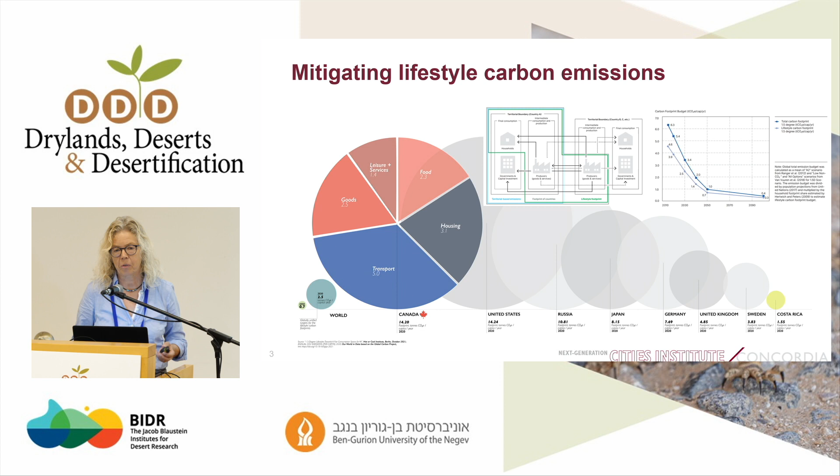We are at 14.2 tons per capita, and by 2030 we should go to 2.5 - a very big challenge. Even the sustainable scenario in 2050 should be 0.7 tons carbon per capita. So we are a very long way off.

But because this conference is not that much about mitigation, but a lot about green infrastructure, I'll show you a bit how we handle data and what we do with modeling. Of course, we also look at green infrastructure in cities and ecosystem services. So it's a bit of a mix - I threw together the different parts.

My expertise is mainly in the carbon emission part, but with a biology colleague, I have some graduate students who look at urban green infrastructure services, especially related to urban heat islands, because as you know, cities are very built up now, lots of impervious surfaces, so there is a strong heat island effect. Green infrastructure also has a big impact on air quality. So we try to look at all these connections between urban forms, urban morphology, whether it's built or green infrastructure, and the services related to it in a combined way.

In the end, we're trying to find the fair consumption space, because there are still people in this world who are underserved, who really should have better access to food and minimum services, but the richer we are, the higher the carbon footprint. So there's also a lot of people who need to reduce consumption.

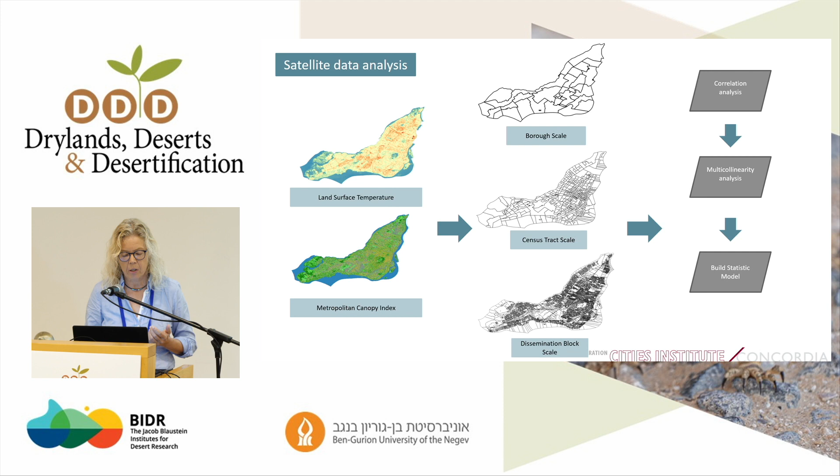We did some analysis of data correlating land surface temperatures and the canopy index to find out the impact of existing greenery on cooling on one hand and air quality on the other.

Remote sensing data doesn't give you very high spatial resolution, so we complement that with ground-based sensor measurements, and we try to find out the impact of composition - distribution of green space - but also configuration: how high trees are spread over the city, and what the impact is on temperature.

Here you see a well-known result: land surface temperature on the y-axis versus high vegetation, basically trees. Looking at it on a borough scale, there's a very strong correlation - if a pixel is very green, with a high percentage of coverage like parks, you get a strong decrease in land surface temperature. It can be up to 10 degrees or more.

If you go to finer spatial resolution, on the dissemination block scale for example, you see a much larger spread, because you start seeing small parks on street corners surrounded by high buildings, so the temperature decrease might be high, but might also not be very strongly affected by the greenery.

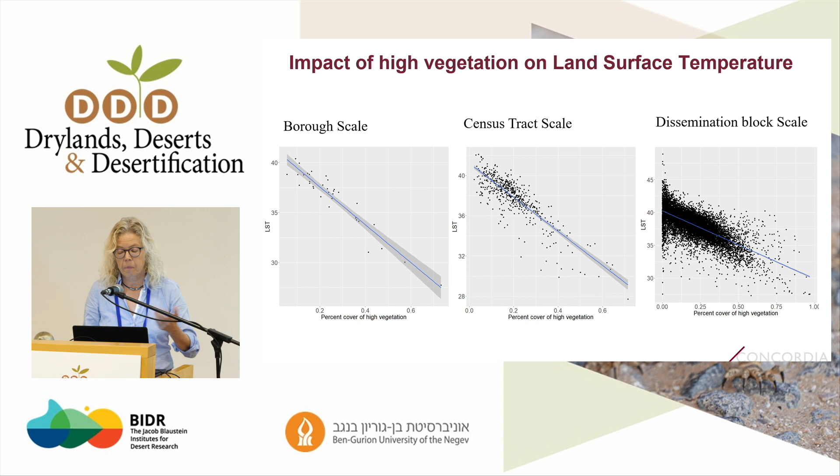That's one result. Low vegetation is a more complicated story - the correlations are weaker than the tree correlation. But of course low vegetation has an impact on surface temperatures, again with a big spread. So now we're trying to understand in more detail by going on the ground to see exactly what the configuration does to temperature. But that's only one aspect.

As I said, we also look at whether it induces people to walk more, if it's a pleasant green environment. So that's the data analysis part.

But as I said, in our platform setup, we also look at connections to modeling tools. Everybody who works on building energy modeling has tools available like Energy Plus or TRNSYS that can dynamically model the heating and cooling load for a city. We use the same front end now to come up with use cases - select an area in the city, give me the status quo energy consumption for heating, cooling, electricity - and then do some scenarios.

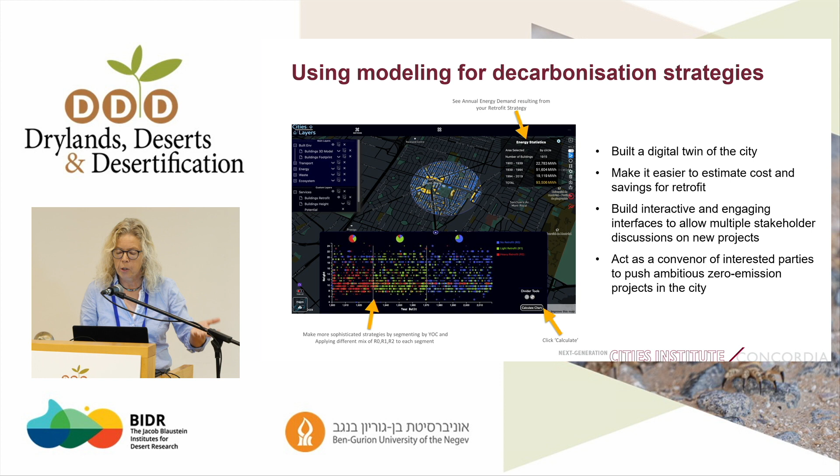Build to code, retrofit to code, or retrofit to a very high efficiency standard, and plot the results over the year of construction of these buildings. This is a municipal strategy tool to plan and cost retrofit scenarios. You can do it per building type, say give me all the hotels, or now Quebec wants to do a regulation on restaurants, and these kinds of tools help quantify what retrofit scenarios really could do.

I don't want to talk about the details of the platform. It's a big undertaking to make an open source, very modular platform. I would be very happy if people want to collaborate, because we need to go across the domains, connect transportation, buildings, green space, and so on. We need a big data handling part, lots of models from different domains, and then some clearly defined interfaces in the middle to connect to different front ends, that's the only thing the user will see and interacts with.

I just want to show you a few of the front ends, because that's probably where we define best scenarios and also start working on user interaction. The front ends also depend strongly on the use case, whether it's a citizen project, a municipal stakeholder, or a real estate setting.

So what we can do with the tool on the mitigation part of the built environment is compare the energy performance of different urban settings, because we have a big debate in Montreal about how dense, how high, what is most sustainable. You see on the top left typical Plateau residential neighborhoods, 3 to 4 stories.

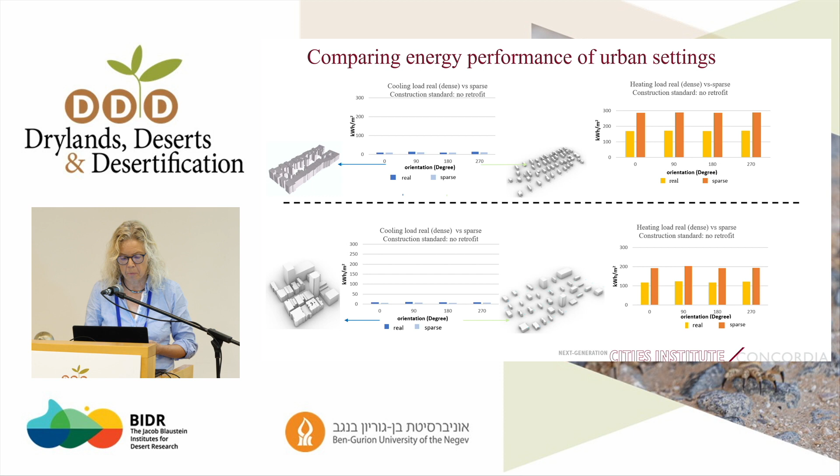You also see that the downtown core has, for both scenarios as it is and sparse, a lower heating demand. Again, the same reason: the buildings are larger and more compact. So this is the kind of analysis we can do.

We can do it building by building. So in the end, we can go to every real estate person and say, okay, look at this building, that's the retrofit you can do. Now I want to talk a bit about the applications and the front end.

I showed you this 3D web interface. The second thing we did, starting first with a competition project, is to say, well, now we have a building complex that needs to be retrofitted, and we wanted people in the neighborhood to play with the model.

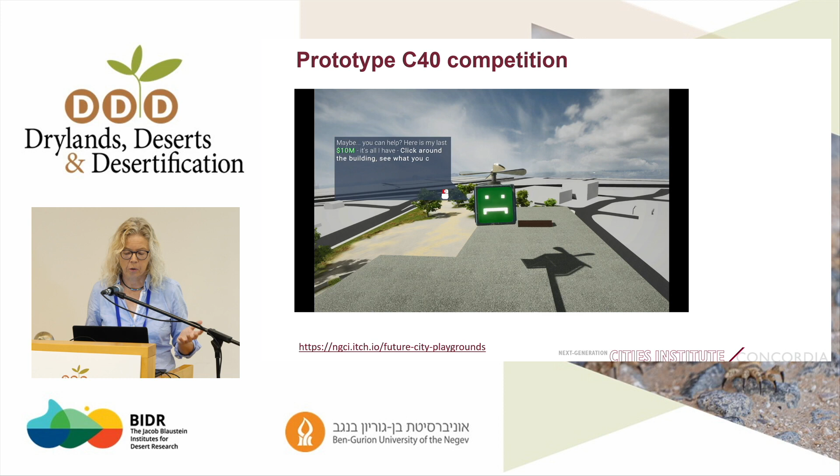So we still do energy, basically life cycle carbon assessment of the project, also life cycle costing, but we want people to play themselves. They don't know that there's Energy Plus and dynamic simulation in the back end running using this API. They basically say, I've got $10 million, who can bring down the carbon emissions the most for the least amount of money? That was the challenge, and we got a lot of people to play. Of course it's just simulation, not an optimization tool, so you can change whatever you want.

You change the wall construction, you change the window types, you can increase the window surface areas. It all costs you money, of course, but it reduces carbon emissions. We also introduced renewables on the roof, and we can put green roofs that might increase the insulation performance of the roof. So we can do quite a lot of variations, and what you get out is the lifetime carbon emission.

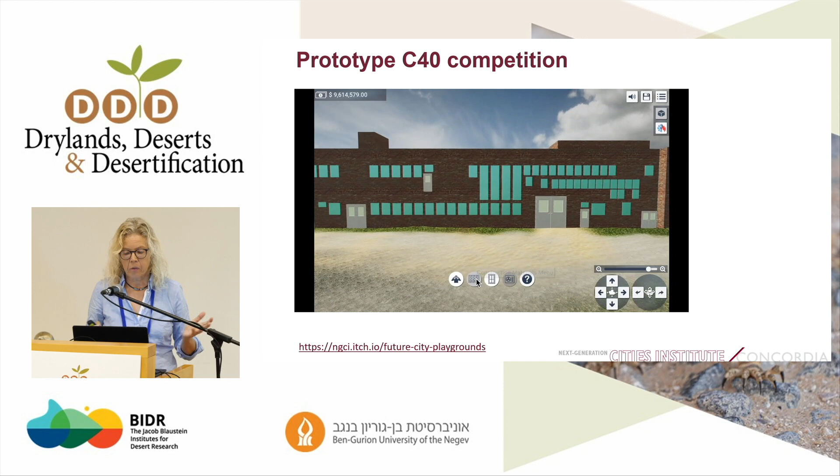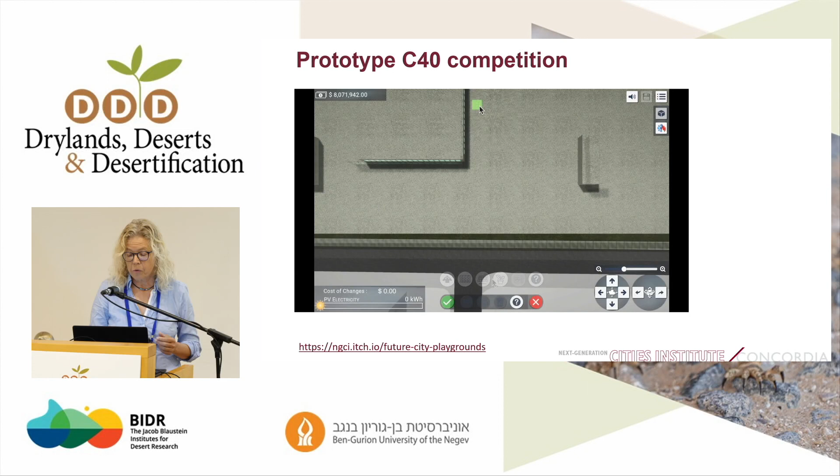This was still a pretty simplified prototype, not that many materials included. Now we made a version more for professionals where you have the full ASHRAE catalogs of building construction materials, and you can really combine materials as you wish. Of course, there are predefined layers for people who don't know much about insulation at all. As I said, you can also put solar panels on the roof, and do some energy system variations and so on.

So it already offers a lot of opportunities, and it's really simple to use. You don't need to be a building physicist. You learn a bit of what certain technologies do to your overall carbon footprint and how much it will cost you. So that was basically the first time we went a bit into gaming.

This is a Unity game engine that we used, and I'll show you where we took it from this very first prototype. So this is now the second prototype, and we designed this tool also based on Unity.

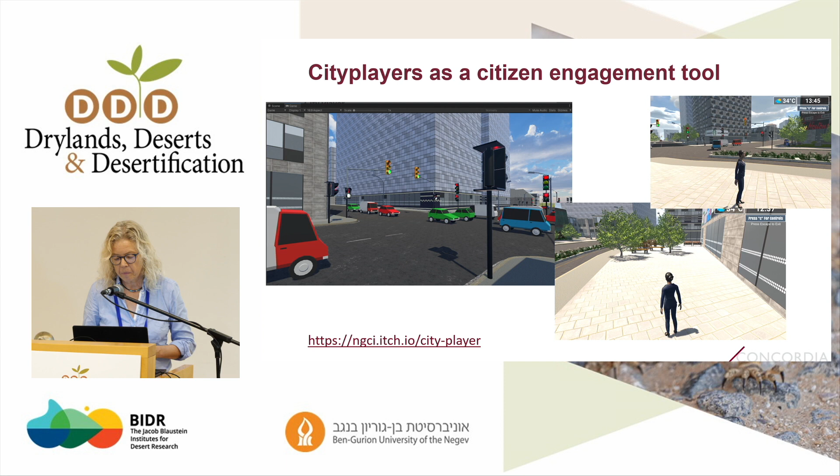This is basically around our campus in Montreal downtown, the Concordia campus. What we try to do here is say, okay, we can calculate all these indicators, life cycle carbon emissions, microclimate, air quality, lots of quantitative indicators, but how do people actually feel about what they see? If you change building heights, if you put in more bike lanes, how do people accept it, or what do they prefer?

This question about height of buildings and density is, in my opinion, very unclear in terms of what people really want. And it depends on who you are, whether you're a child, a single mother, or an old person.

So we have these versions. You can play different roles in the game, but you can also play as the city planner and say, now let's talk about density, let's increase density in the existing stock, or put new buildings in the parking lots, and so on. As it's a game, you need to do a bit of work to unlock further levels. At the beginning, you can just change the height and the usage of the building. And it does work.

I don't know whether I can talk about it. I won't sing, I promise.

So you change the height of buildings, and you get all these indicators on sustainability, but also other indicators like green space, access to public transit, and so on. So here we changed this, this is more the city planner view.

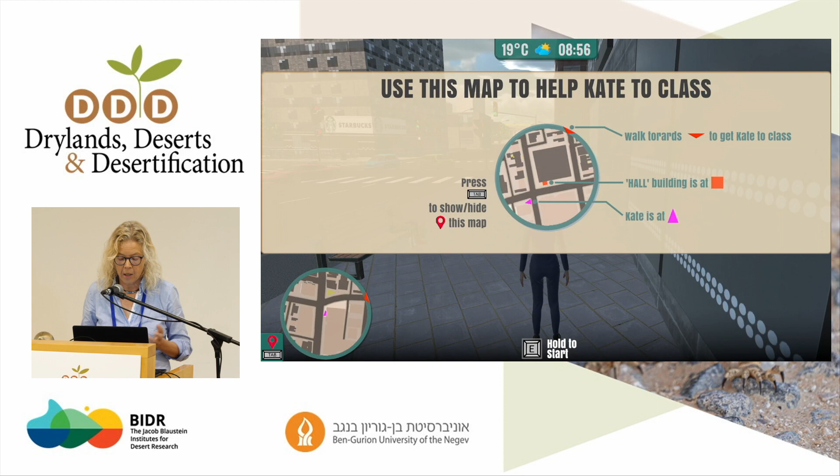You can select buildings depending on type, but then you zoom into a person and play a day in the life. You get some tasks, and for example here, the student needs to be in class by 9 a.m. and has only a few minutes.

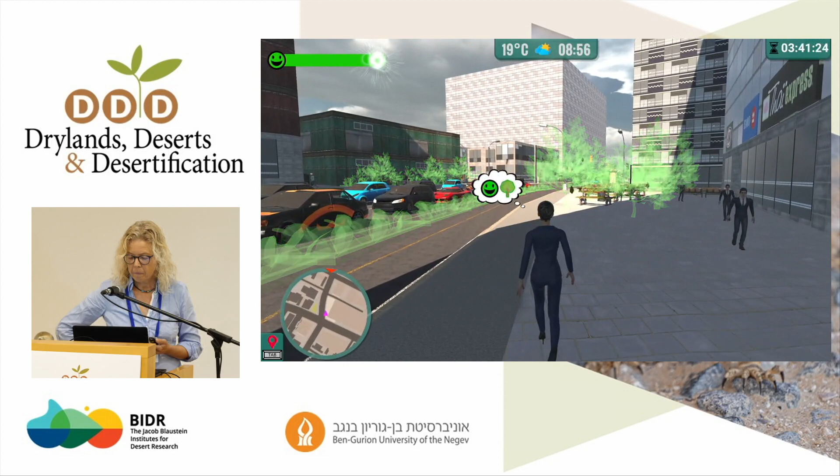Yeah, so now we want to have scores of how people like the environment they walk through. I always love seeing trees, truly pleasant to the sight. And the goal is to make the player as happy as possible, because that gives you eco credits to then do further action. It's not all that safe to walk here. Oh no, I don't have much time left. Ugh, I hate waiting. It wasn't me who designed the high heels, by the way. The city really should work on this public hygiene. Quite a nice touch of nature. I'm here early.

So then, depending on how good the experience was, you earn credits. You can then go to the next level and change more things in the city. As I said, we just started that a month ago. It's a very, very early prototype, but we want to really use that in the city to get feedback from the users of what they like and what they don't like.

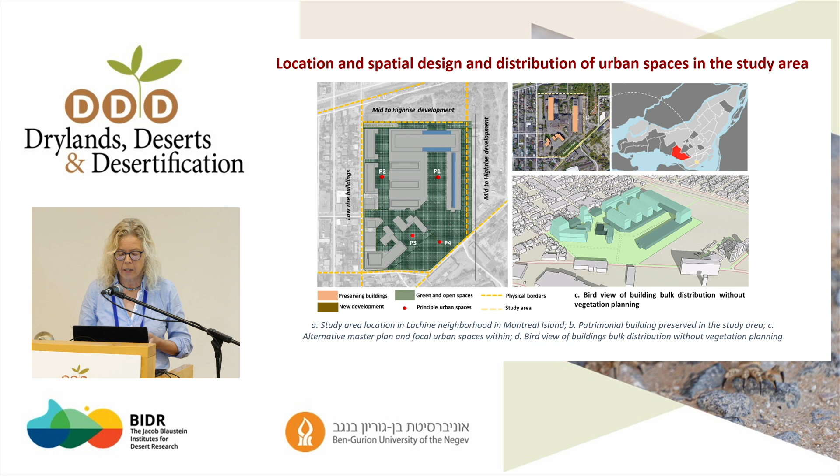Okay, I want to just finish off in the last 2 minutes with one last point on this combination of 3 models. Here we worked on an existing district and basically tried to look at what the inclusion of greenery would do to the indicators on microclimate and walkability.

So we have now different tools to generate different configurations of geometry, but also of greenery, so low, middle, high shrubs or trees, and so on. This has an impact on the detailed temperature distribution. So we model the temperature distribution, wind flows in the canyons, and so on in these areas. In the end, you get quantitative information on how a certain tree coverage, for example along the pathways, changes temperature levels, making it more comfortable to walk.

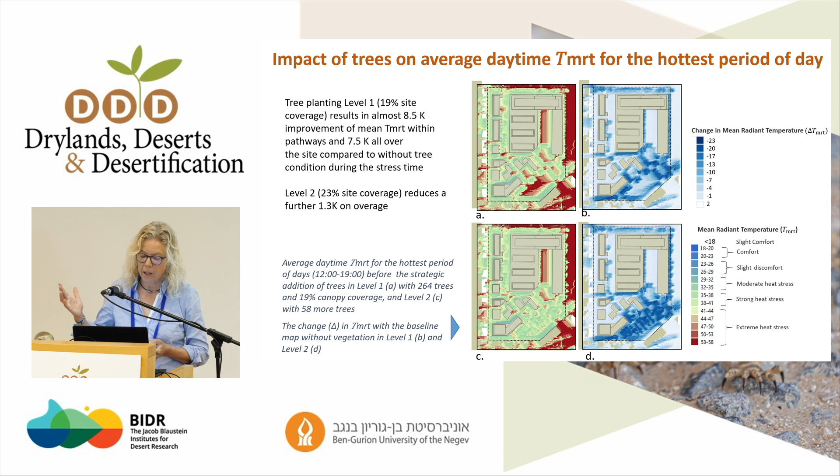That's one thing, but whether people do walk more is, I think, a different story. That's why we want to have these other approaches, going beyond the quantitative information we can calculate, to see whether people really walk more. To get that into practice, we also work with stakeholders in the city. One idea, because things are moving very slowly, is that we're never going to reach the 2030 goals if we continue at this pace.

One of my activities is to bring decision makers together. We call it a SWAT team - a banker, the utility Hydro-Quebec, the city, and a real estate developer - to identify all the barriers to a more sustainable project. If it's financed, the banker has a green bond, and if it needs zoning, the city is at the table and needs to support the project. We'll do two projects every three months, starting basically now. I think that's our attempt at going beyond modeling, bringing real change to the city.

To conclude, I think simulation is useful because it helps quantify things, but also, via these game-like tools, to get a feeling of what people prefer - better than surveys, I'd say. Eventually they'll have virtual reality tools to really walk around the areas and give us feedback on what they prefer. Whatever we can do, we need to bring in all these different methods to achieve faster rates of decarbonization, because I still believe in mitigation. Thank you very much.

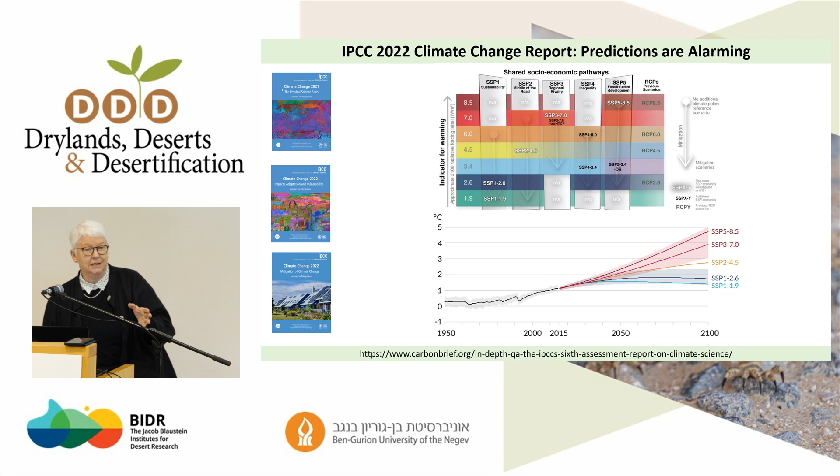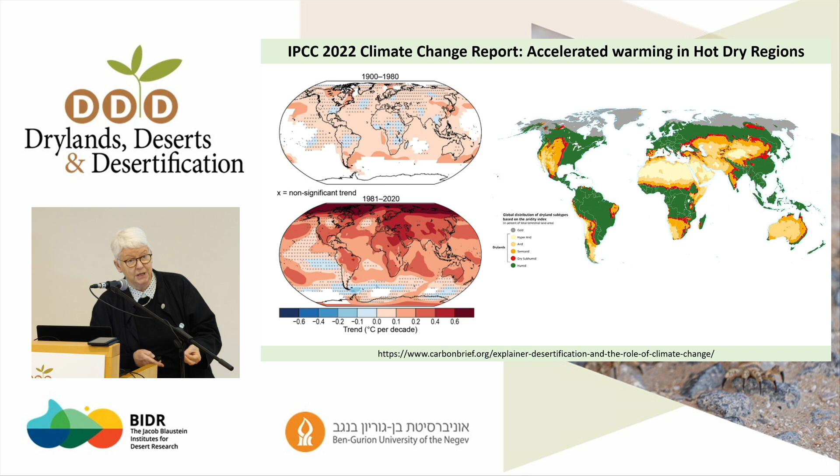This is the IPCC 2022 Climate Change Report, volume 3, on mitigation, and the predictions are really alarming. Looking at current projections, we're looking at a 3 to 5 degree centigrade increase in temperature. We're at 1.5 now, and look at the climate catastrophes already hitting us around the world - records broken almost every day. And of course, accelerated warming in dry regions is going to be a real challenge, as we've heard.

Now, what about temperature? Temperature kills. The 2003 European heat wave - over 72,000 people died in buildings during that one event. In 2022, we had heat waves across Europe, and over 20,000 people died in buildings during that event. And the 2003 heat wave, by 2050, will be considered a cool summer.

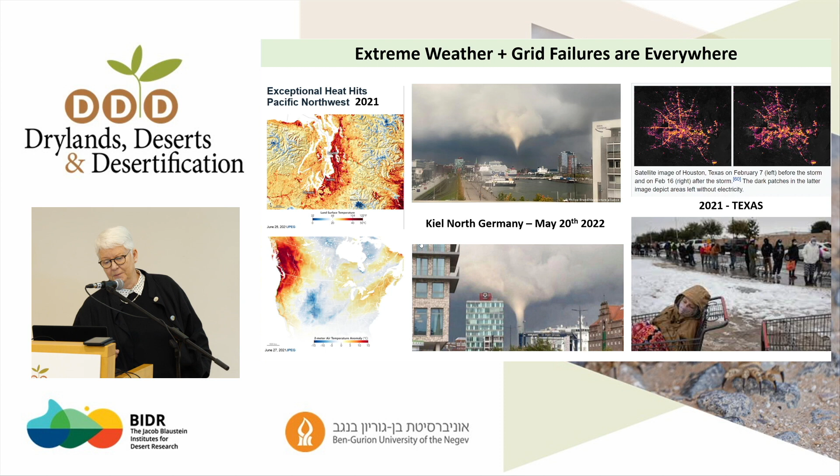So let's talk in real terms about what's happening. It doesn't matter how rich or poor you are, or where you are - these weather catastrophes, these extreme weather events, will hit, and they will be associated with grid failures. That's inevitable, whether you're in Kiel, North Germany this year, in Texas with ice storms, or under a heat dome in British Columbia, Canada, where temperatures reached 43.

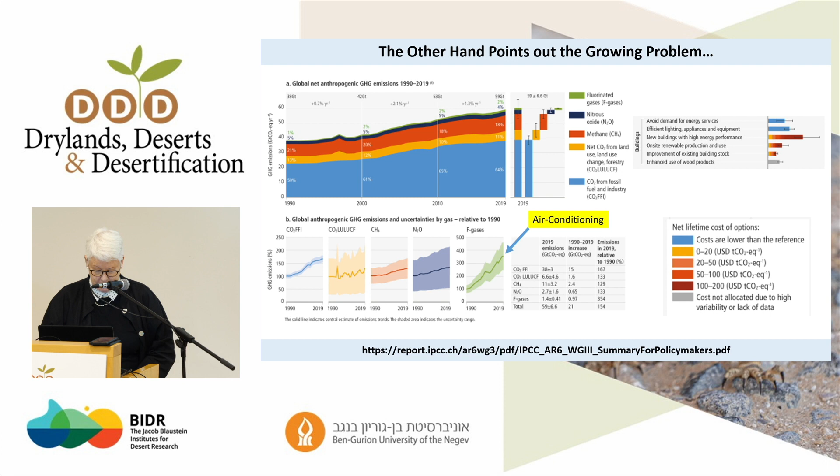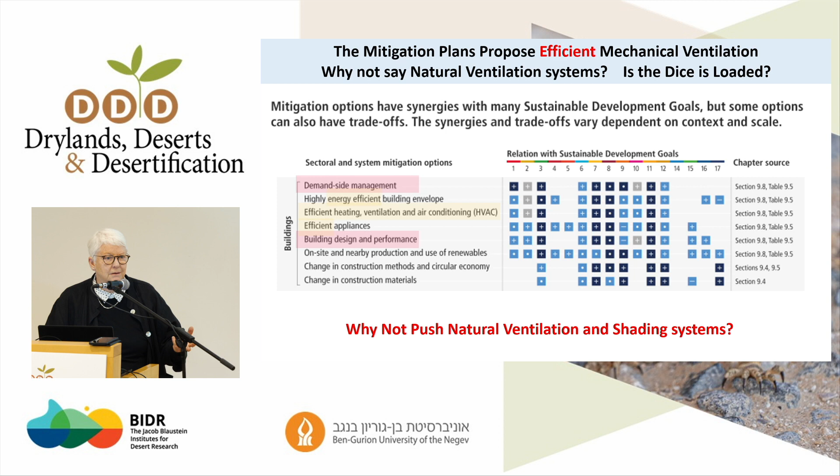Where are things like running buildings on natural ventilation? Where are important passive design features in that list?

Now, buildings are responsible for 31% of global final demand in energy, 21% of global CO2 emissions. Residential buildings are responsible for about 70% of global final energy demand for buildings. And between 1990 and 2019, CO2 emissions went up by 50%, and electricity used globally by 161%.

So what's happened to all the billions, if not trillions, spent on the big projects across Europe? Where have they evaporated to? They're having no results. So why?

Why not, again, say naturally ventilate buildings for as much of the year as possible? Why not say design energy sufficient buildings? Why not put in, again, mandatory shading? No, it's all product related.

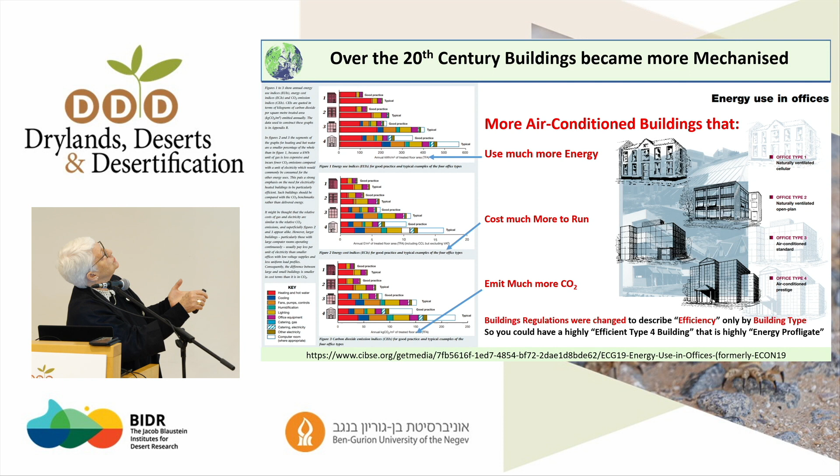This is from 1990—we knew back then. This is 1960s naturally ventilated. This is standard air-conditioned buildings in terms of energy use, and this is large prestige glass buildings, tall or not. So we got from the best of these naturally ventilated traditional constructions to there—you got 4 or 5 times more—and they are sold as efficient buildings.

This is the energy efficiency flaw, right? It is possible for a building, vehicle, or system to be highly energy efficient, while at the same time to be highly energy consuming. And by the way, if you want the slides, I put all the references for this.

And I mean, look—if we look back, say, at the Negev, we had the traditional buildings until about 1950. We got the introduction of a world in which energy was going to be too cheap to meter, built on the fossil fuel industry. These are the types of buildings that gradually grew up until we got post-1950s. We've grown into a world which normalizes the highest energy building types on the planet.

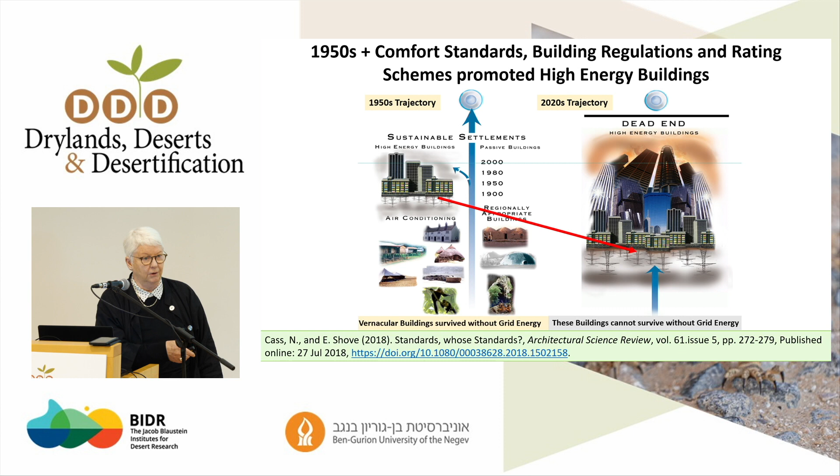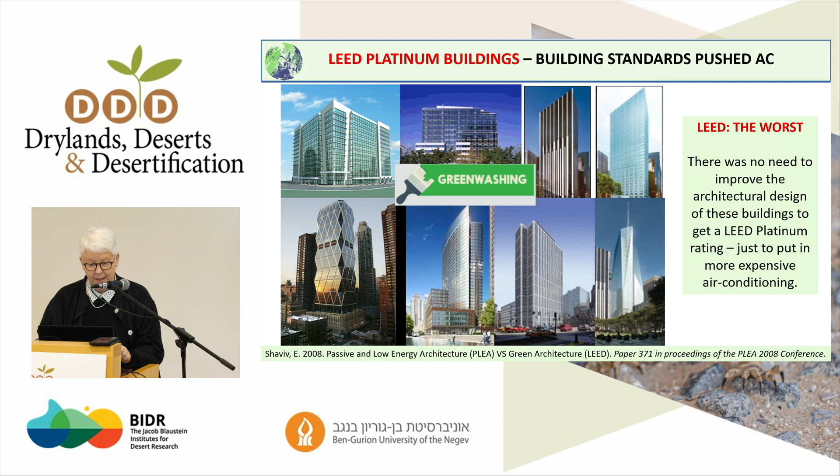For use by the rich—only the rich live in these or work in them. And then we overlay that with standards, rating systems, that greenwash—systematically greenwash buildings. LEED is the worst. You couldn't get a LEED Platinum unless you had full centralized air conditioning, as Edna Shaviv pointed out very carefully. This was originally run by Rick Fedrizzi, who's the environmental chief lead at Carrier Air Conditioning. So you couldn't get LEED Platinum without something like that.

And models are fine, but the performance gap—this is assumption-dependent design models. So they model in BREEAM or a complex model, which rarely reflects the actual performance of a building in use.

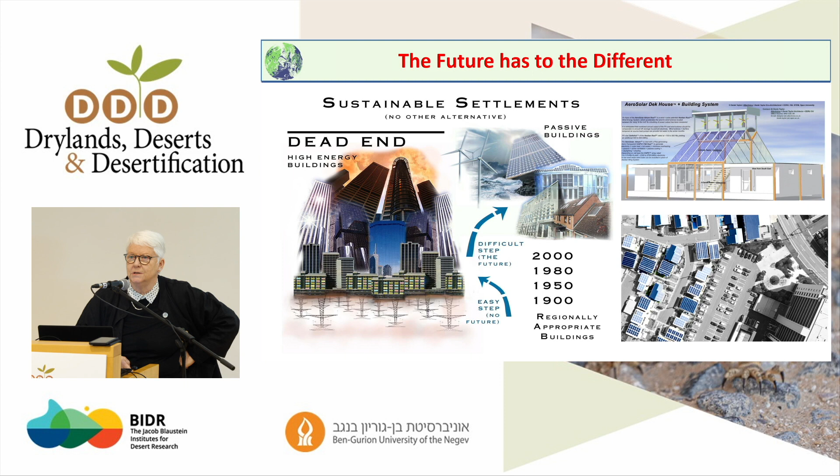The future has to be different. It has to be very different if we are to survive, if the planet's to survive. And IPCC has recognized this, so we're going now into sufficiency. Building sufficiency is put at the top of the list, right? Above efficiency and above renewable energies integrated.

Sufficiency measures tackle the causes of greenhouse gas emissions by limiting the demand for energy and materials over the life cycle of buildings and appliances. And that's different from energy efficiency, which in contrast is about continuous short-term marginal technological improvements.

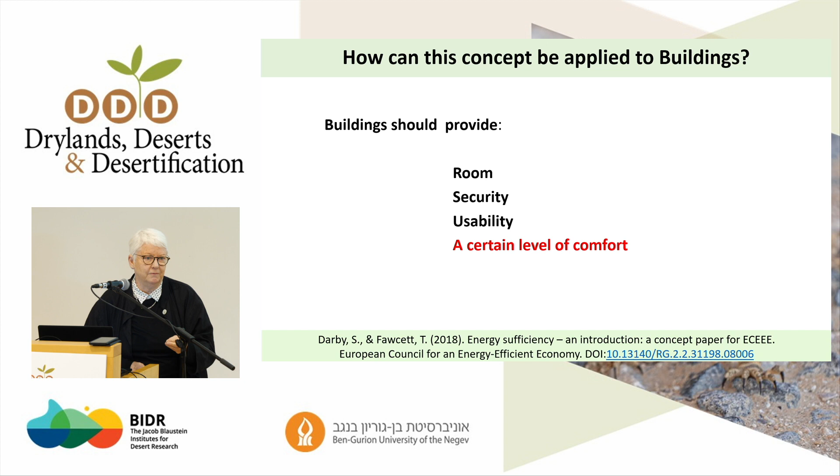Sufficiency, energy-sufficient buildings—sufficiency is about the amount of something that is enough for a particular purpose. And early publications on sufficiency, recent ones, this is 2018: buildings should provide enough room for you, provide security, usability, and a certain level of comfort. So comfort should be at the heart of the building solutions, right?

We have to have buildings that provide acceptable comfort temperatures. So what is an acceptable comfort temperature? Now, there's two methods of looking at this. There's the engineering, the HVAC engineers' measure, which is based on a heat balance method.

Typically like PMV, four basic physical parameters and two assumed levels of clothing and activity, based on very limited and often quite poor and dated laboratory research. These steady state conclusions come up with very limited comfort temperatures.

So for instance, they promote more HVAC in buildings by grading buildings, like an office building. An A-class office building has a very narrow temperature zone in winter and in summer. The narrower the zone, the more HVAC you need, right? So an A-class has to be a really high-tech, fully equipped, air-conditioned building.

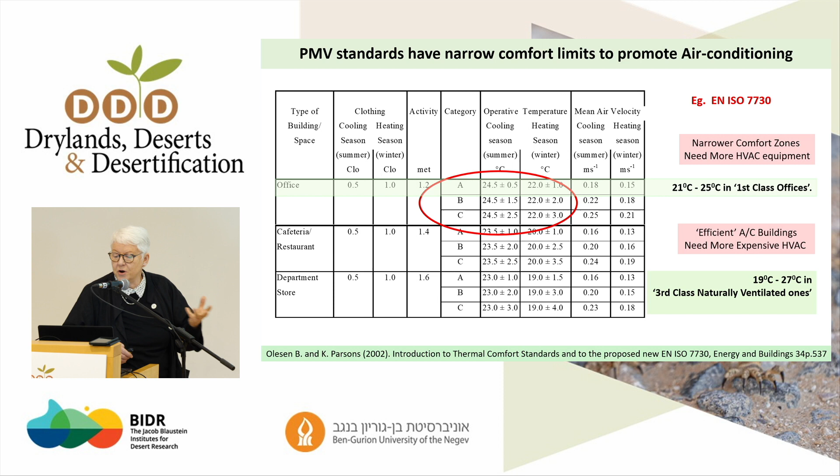A C-class, which is third-class building, has a much wider range. So first class might have 21 to 25, and a third class building might have 19 to 27. You can have that internally. There's troubles with very tightly controlled buildings, which have thin, tight skin envelopes, in that when the grid fails, you have to get out of them. And that happens across the world all the time.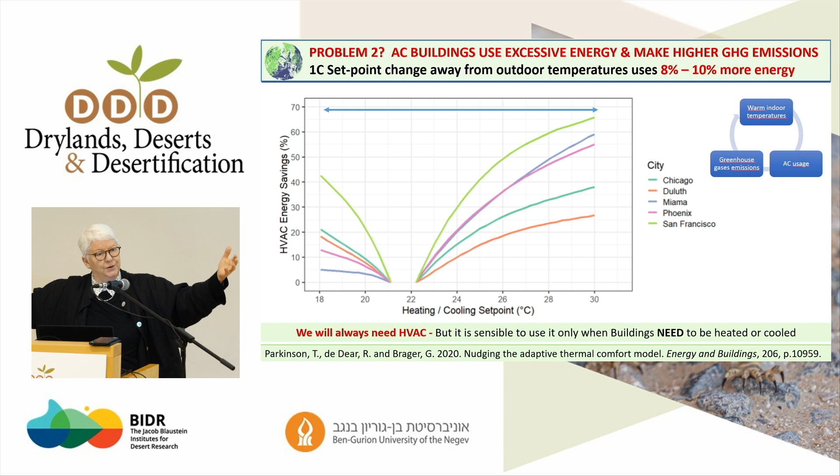They're doing this in a lot of countries. Netherlands now has mandated 18 to 28. You can have anything in that range in their government buildings. Italy's the same. So you just simply set the thermostat lower in winter and higher in summer, and you can save easily 8 to 10%.

Third problem with it is that the ASHRAE standards have led to significant overcooling of buildings. In America, $10 billion wasted simply by having buildings that are too cold.

Number 4 is that it's fine promoting and pushing efficient technologies on people like hydrogen or heat pumps, but people can't afford to eat. In Britain today, how are they going to afford to buy a £15,000 heat pump, let alone run it? So people have to get real.

The second way of measuring comfort is the adaptive thermal comfort, which came out of work from the 30s onwards in the BRE in Britain. And they showed very early on people can be comfortable from 38 to much lower temperatures, 18, 10.

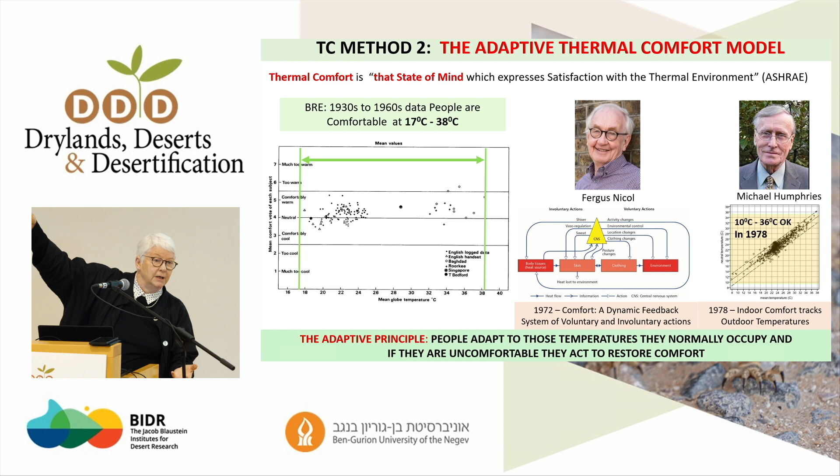Fergus Nicol and Mike Humphries, who I work with, Fergus Nicol did this wonderful comfort as a dynamic feedback system, and Mike Humphries showed the algorithm where the indoor air temperature you're comfortable at relates to what climate you're in. So the hotter it is outside, the hotter you're comfortable at. It's pretty simple, but he provided the algorithms we can use.

You just go into real buildings, you do a comfort survey, ask how people are feeling, what their controls are, is the window open, is the blinds down, ask about how comfortable, note their clothing, measure the environment. And out of that comes a lot of data from which you can extract the algorithms statistically, or you can look at comfort clouds.

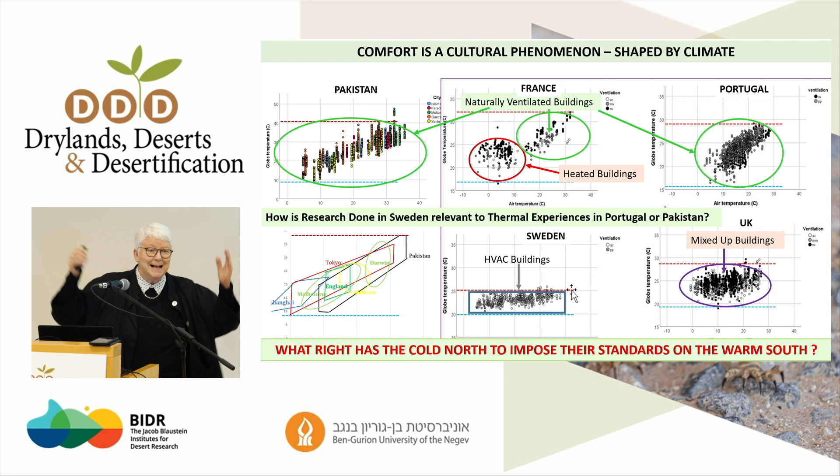People in France, they heat in the winter, they naturally ventilate in the summer. In Portugal, they naturally ventilate all year, they get a bit cold in winter. Britain's all over the place. In Sweden, it's a cold country, they just have heating on all year, and they have 20 to 25 typically.

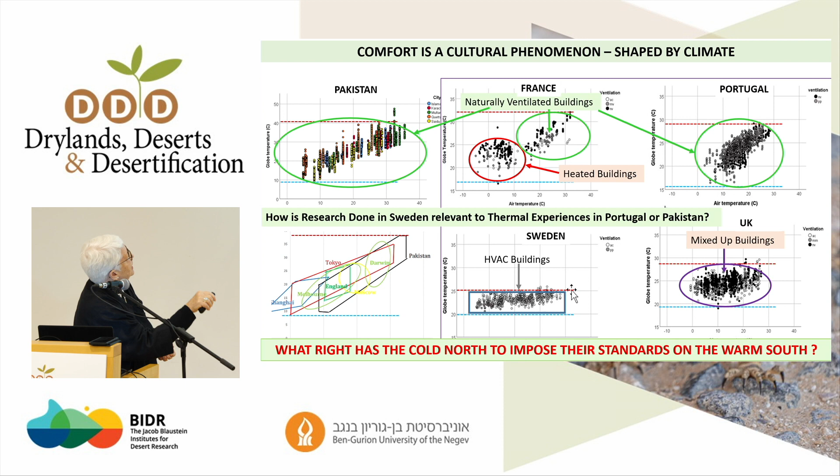And if you look at these comfort clouds from Pakistan, Tokyo, Shanghai, England, Melbourne, these are the comfort envelopes people live in.

International standards are a form of comfort colonialism. They take the ASHRAE standards and apply them to India or Africa. But comfort is what we do to avoid discomfort, to keep our deep body temperature at 37.

We interact with the world around us, and we can calculate this. We have involuntary actions of the body, like when we're cold we shiver, and when we're hot we sweat. Physiologically, we adapt. The naked body doesn't need to do anything to keep comfortable between 28 and 33.

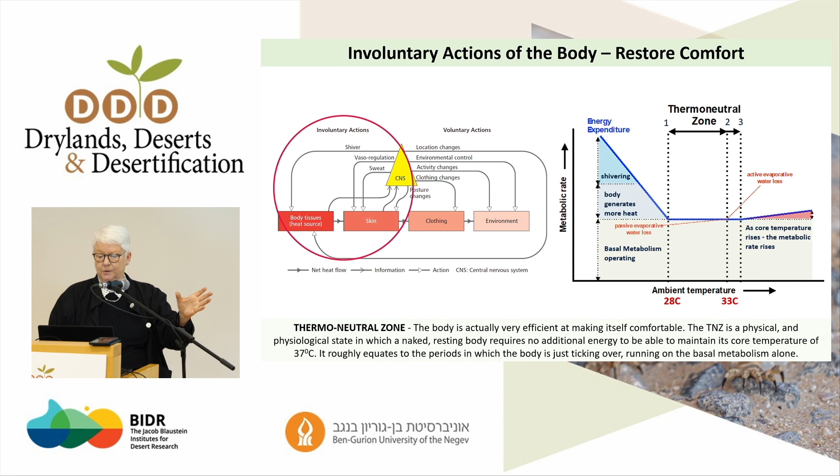We change our clothing and activities, and we exploit adaptive opportunities, open a door, window, fan, etc. Change rooms, change places. The principle is people adapt to those conditions they occupy, or else if they're not comfortable, they change them within limits.

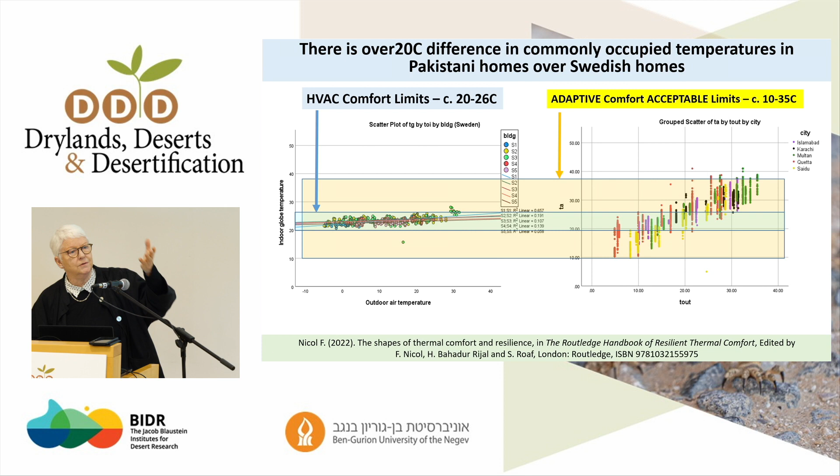And here's the limits. From thermal comfort studies around the world, people can adapt fairly easily anywhere between 10 degrees centigrade indoors and 35 degrees indoors.

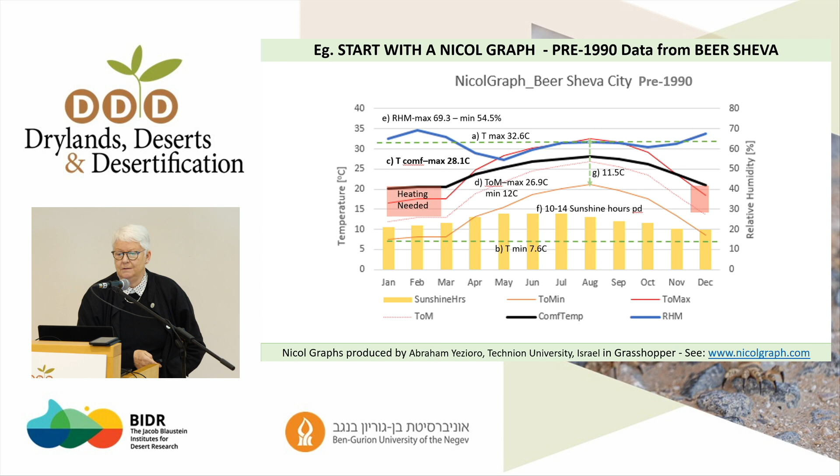Now, if anybody's interested, I will show you how we use Nicol graphs. This is a Nicol graph from Beersheba for pre-1990, and it shows that we got maximum temperatures of about 32.6. And that can tell us what sort of building is suited to the Beersheba climate.

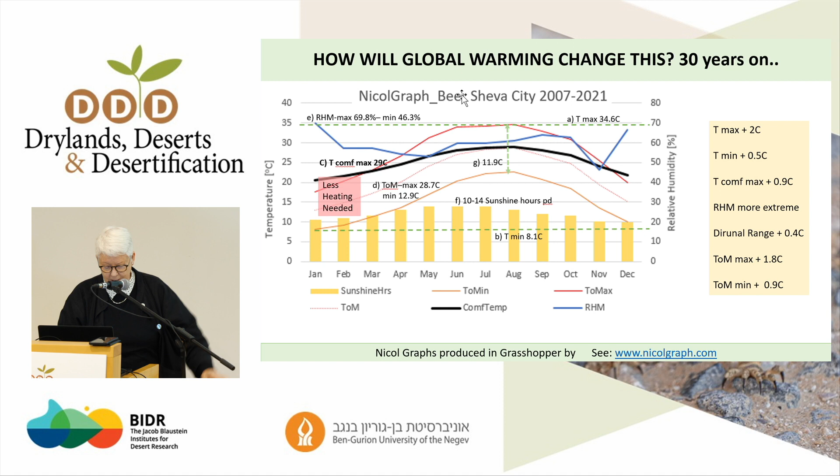What we have to do for buildings in the 21st century is move beyond the HVAC building, which was the dream of the 20th century HVAC industry. That's already business as usual. The future has got to be mixed mode, so you use cooling and heating only when you need it.

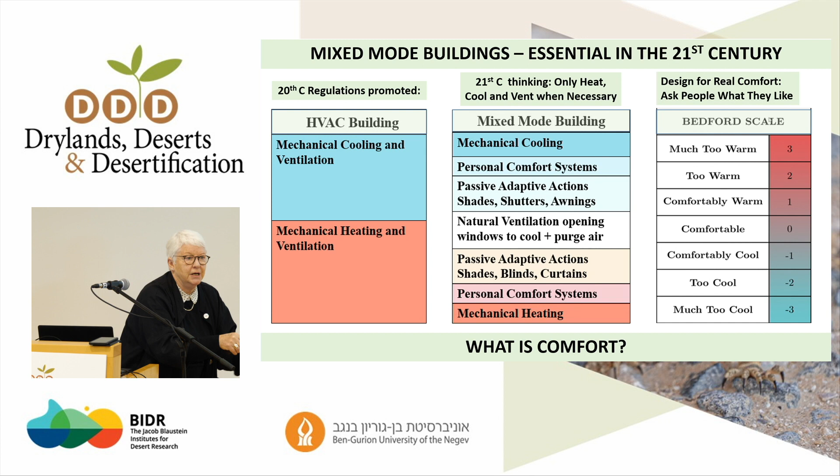You can use personal comfort systems for much of the year as well, or simply open the window and rely on natural ventilation, shutters, and shades. This minimizes your energy use, because the difference between what you need and what you want can be seen as a measure of sufficiency in terms of comfort.

In buildings in a heating world with ever more extreme weather, what you need is what will keep you thermally safe in the building you're in when the grid fails during extreme weather. You can do it with passive design.

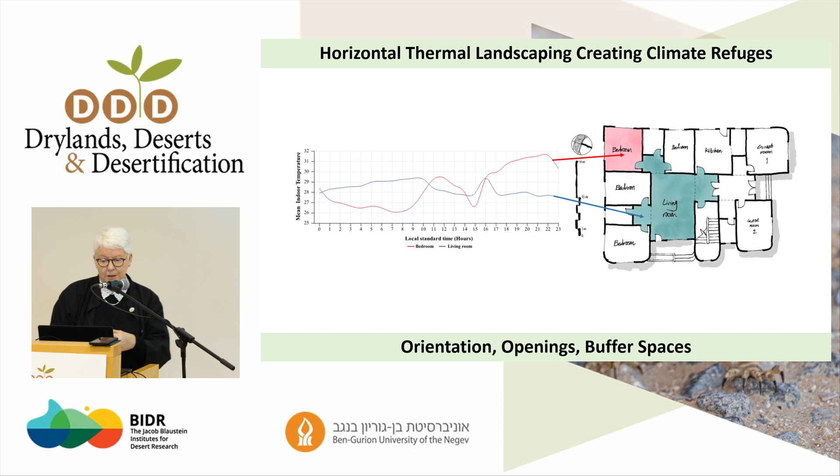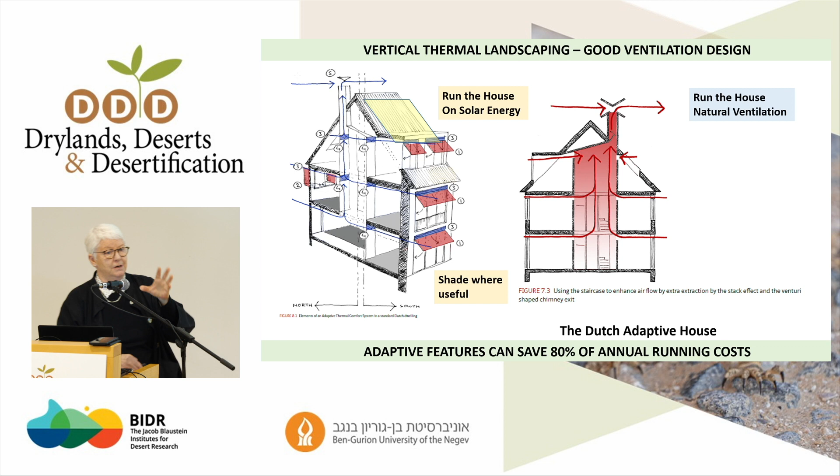Horizontal thermal landscaping within buildings is incredibly important, so you occupy a cool zone in summer and a warm zone in winter. Vertical thermal landscaping through a building is important too, so you have to know about ventilation in buildings and understand time lags.

Understand time lags, because when you're deep down in the earth, the temperature is a month away from what's outside, so you've got some resilience.

Get the windows right with secure shading. Create comfort zones and shallow plan buildings so you can naturally ventilate.

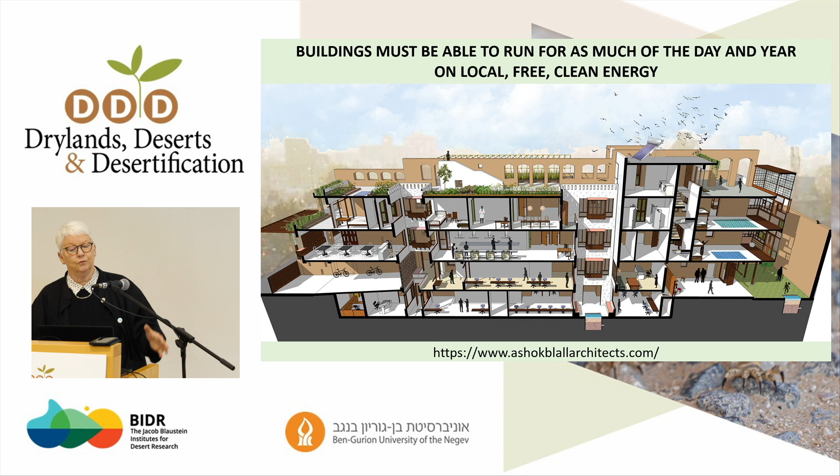Hot, dry climates have particularly dangerous temperatures, so as Ursula was saying, you have to have cool cities and communities. I've got lots of links to YouTube talks on cool systems around buildings.

Future cities will have to be energy sufficient, not energy efficient. Passive survival buildings run on local energy, buildings for people and the planet, not for development profit. Thank you.

Buildings for people, not for developers and profits.

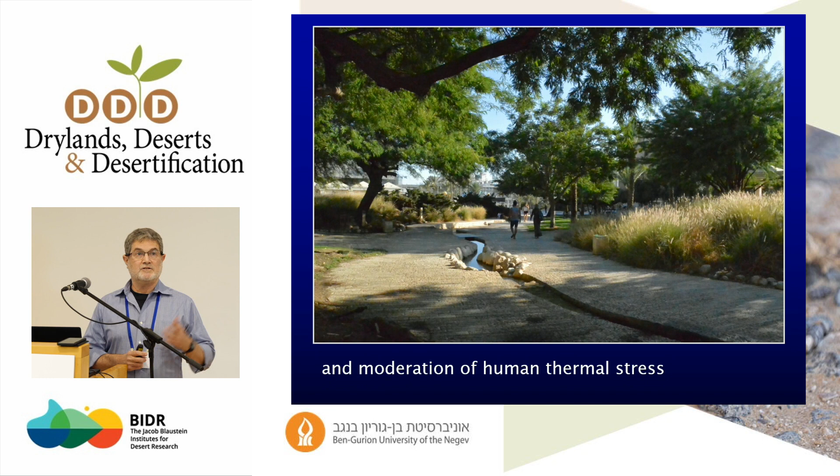And when we talk about this moderation of thermal stress, in hot conditions, we often talk about cooling the city. We talk about temperature, we also talk about humidity of the air, the rate at which the air flows, the wind speed. But how much cooling do we actually get? A greener city, we saw some evidence before, a greener city

lowers land surface temperatures. But how much does it actually influence our sense of comfort, our thermal stress? And how much is this actually a function, at least in our part of the world, in dry lands, in arid and semi-arid regions, such as basically all of Israel, how much is this really a function of radiation? How much is this a function not only of the radiation that our body is absorbing from the sun, but also what's reflected from the ground and what's emitted from surfaces that are soaking up this solar radiation?

So in a word, we're talking about shade. Very, very simple word, a little bit less simple when it gets down to it. But what we found over and over in previous work is that on clear summer days, our perception of comfort is dominated by exposure to solar radiation, sometimes though in a less than systematic way, more of an intuitive way.

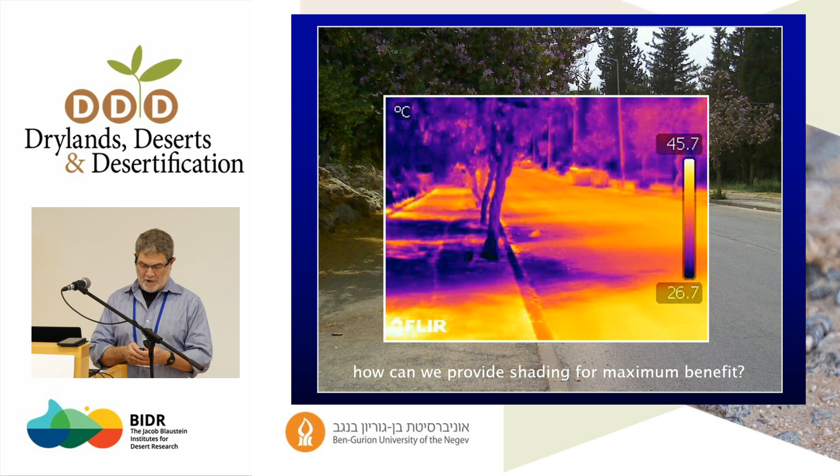So how can we provide maximum shading for the maximum benefit? To answer this question, we've been working for the past several years now on a project. This is funded by the Israel Science Foundation. And what we're doing is we're developing a tool, a microclimate analysis tool, to combat urban heating so that we can help urban planners, decision makers, let's say, get more bang for the buck. In other words, prioritize their interventions in urban trees and green infrastructure.

This is an ongoing project. I'm going to show you the first two phases of it here, and the third phase is near completion now. So in the first stage, we did a very, very extensive monitoring campaign, measurements in the city of Tel Aviv.

The purpose of this is to calibrate a model, which will be part of the design tool that we'll be offering. In order to do these measurements, what we want to do is measure everything necessary to be able to express the physiological thermal stress of a person.

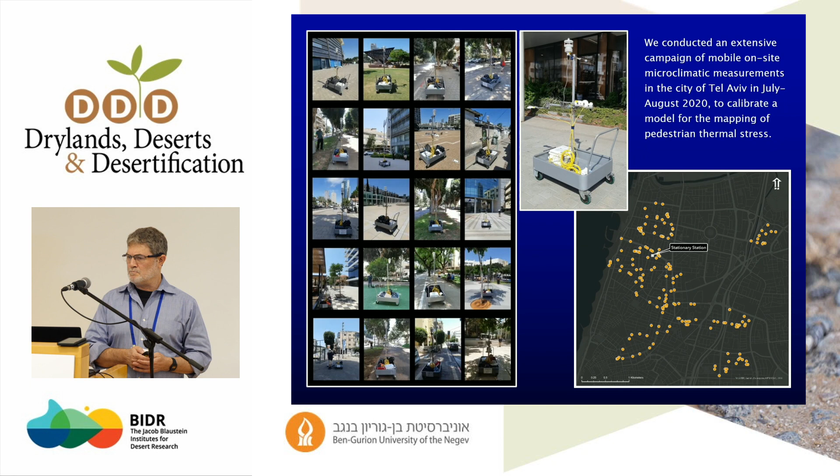So, very briefly, what do we find? What we see here on the y-axis of all these graphs is what's called the physiologically equivalent temperature, one of many so-called comfort indices. This is not air temperature. This is an expression of the entire energy balance or exchange of energy between a person and the environment, mainly by radiation and convection, but it also accounts for heat loss by sweating.

So it essentially quantifies how much cooling by sweat evaporation under warm conditions we need to stay comfortable. Let's see how this comfort index correlates, first of all, with air temperature. Not so well. What does that mean? Does that mean air temperature doesn't affect comfort? Of course not, temperature does affect comfort. But the variation in air temperature during different times of a summer day and between different points within the city is relatively small, and that's not the main thing driving differences in thermal comfort.

Same thing with relative humidity, not a very strong correlation. Even wind speed, which is a bit more localized, still not a strong correlation, but with solar radiation we see a much stronger connection. And the strongest of all, we saw before reference to the mean radiant temperature, which essentially expresses the entire radiant field.

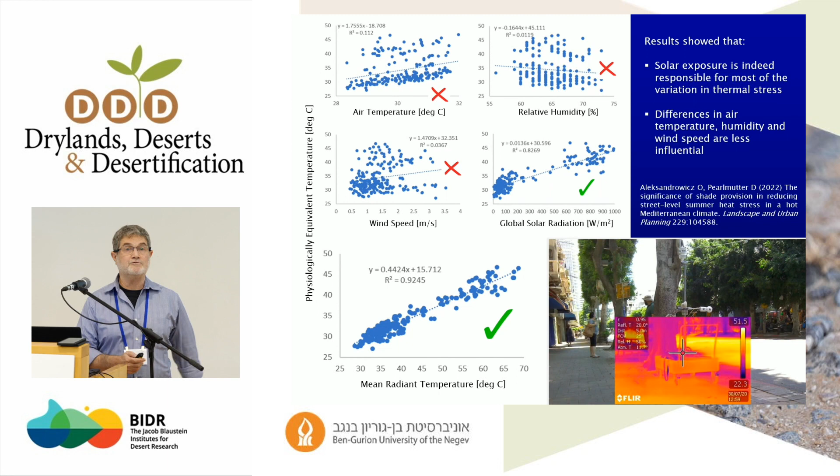So solar exposure quantitatively, systematically, is indeed responsible for most of the variation in stress, and the other differences are less influential. So if we know shade is so important, do people take advantage of it? This might seem like a very intuitive question: how many people actually walk or travel in the shade when it's available? There's shockingly little quantitative, systematic evidence to tell us how much they actually do.

So in the second stage of this work, led by Michelle Levinson, we actually observed people on a very, very large scale, again in the city of Tel Aviv in the summer. What we did is take time-lapse photography, or high-frequency photographs, of strategically selected points in the city, usually where we could identify shaded and unshaded locations within the same view. We used screen lines to count pedestrians walking in different locations, and quantified the volume of pedestrian and bicyclist traffic at different times of the day and in different locations.

So what did we find? Top line: do people walk in the shade? If we take our entire overall sample, during the hot hours on a summer day in Tel Aviv, all else being equal, about 60% of people are walking in the shade. What about that other 40%? They're in the sun. At this top level, we also don't see much difference between pedestrians on foot and bicyclists. This is a quite large sample, over 5,000 people identified from about 60,000 individual scenes, which Michelle's automated system for counting pedestrians embodied.

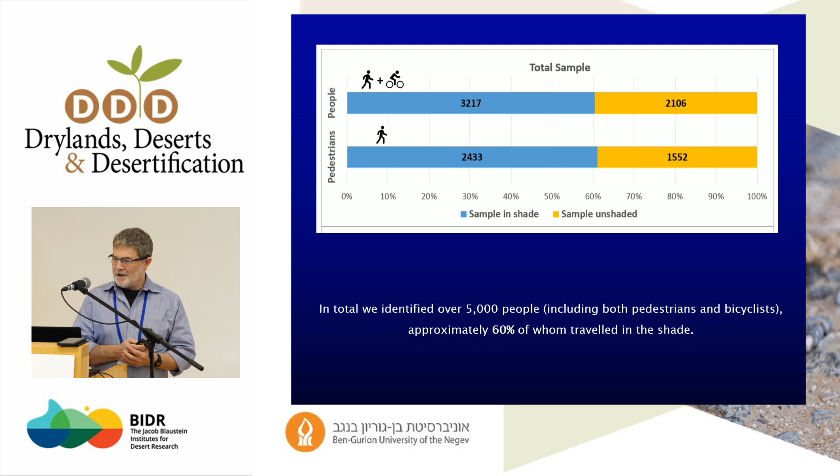I think what's much more important is that not every location has an equal opportunity of finding shade. Some have more or less shade within the same location. So we classified locations into shade availability categories. As you can see, the more shade there is, the more people will use it. That should be clear, but I'd like to focus on this intermediate category, number 3, in which we evaluated the space as having a relatively equal amount of shaded area and unshaded area.

Then the proportion of people walking in the shade goes up here to 65%. If we look only at pedestrians on foot, it goes up to about 70%. You can see here in the map that the preference for shade is relatively widespread, equally distributed within the city. There are some points where a majority, even under equal circumstances, are in the sun, because there are always special conditions.

What's most interesting for me is when we compare locations with different proportions of people in the shade and the sun, to what extent is that a function of the actual conditions? In other words, if it's the hottest part of the day, the sunniest part of the day, or the late afternoon when both temperature and solar radiation exposure are at their peak, will that influence people to go out of their way to find the shade? The answer is yes, there is a signal here.

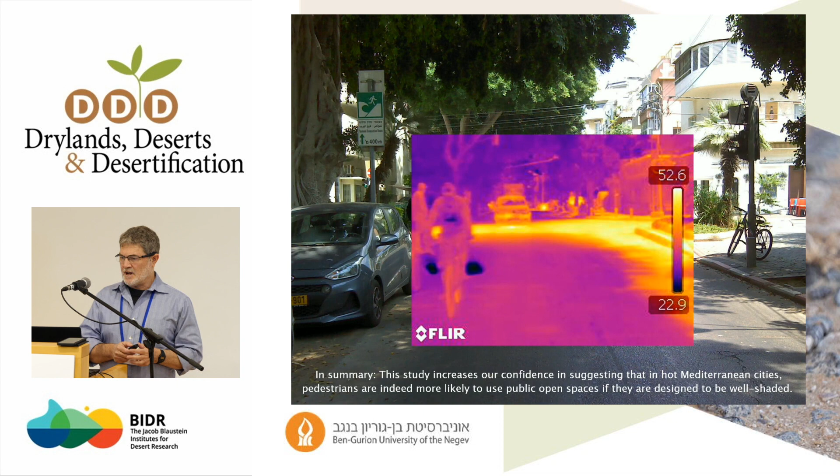I'm going to mention a couple of things with the time I have left. One is a book called The Urban Forest, which had close to 100 contributors from all over Europe. If anybody's interested in this particular field of urban green infrastructure, this is sort of the state of the art on the environmental, social, and governance aspects of urban trees and green spaces.

And the International Association for Urban Climate has a quarterly online newsletter. Anybody interested in urban climate should definitely check this out. Since I've been editing this for quite some years, I'm always interested in contributions as well. So thank you, short and simple.

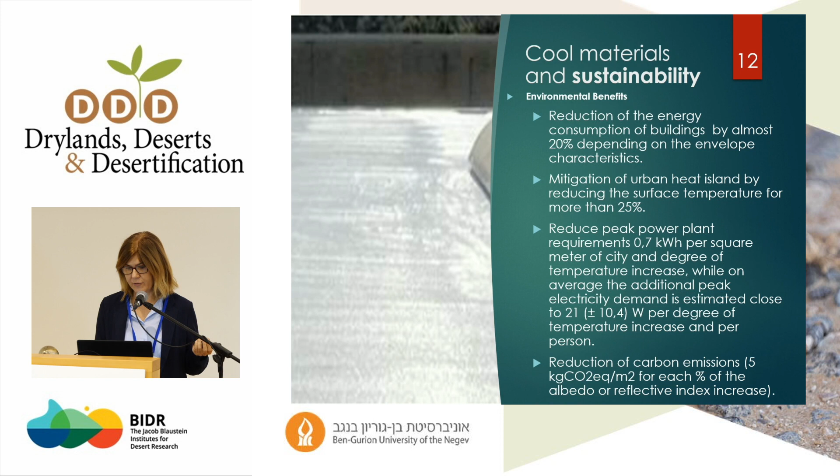What are the social aspects? Improved thermal comfort, reduced health risk in cities, which is considerably higher than in rural environments, and also things related to outdoor comfort.

Tackling energy poverty by low-cost energy innovation, something that can be applied easily. We have some case studies in Southern America, in Brazil, and other areas for low-income population that don't have insulation, and there's a considerable increase of thermal comfort.

There's also economic benefits. This is something that can be discussed, but maybe it's increasing the value of assets in the real estate market, reduces the energy bills for sure, and improves the performance of rooftop photovoltaics, because it lowers the temperature of the roof and then increases the efficiency of the photovoltaics on top.

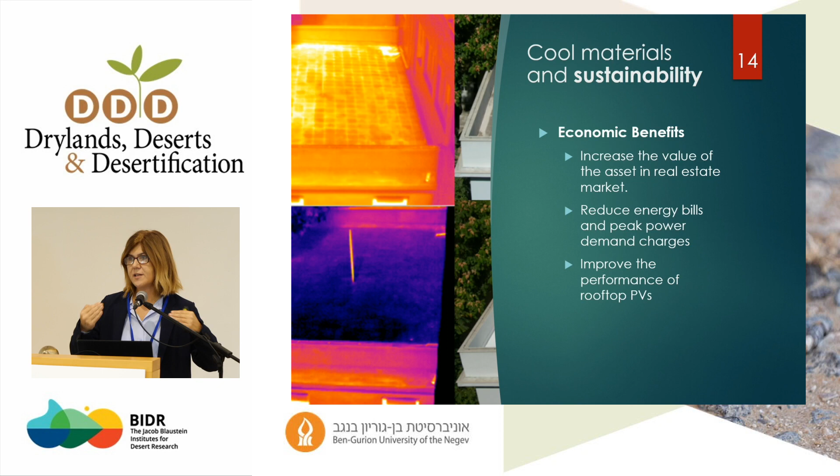So there is a market around the globe. Here are some companies giving details about the growing market. It's an expanding market, worth $3.5 billion in 2019, and is expected to rise more and more, and I have more data on that.

So I would show you three case studies developed in the last period in a European project called ReCO2ST. One is in Spain, the other one is in London, and the third one is an urban environment we tried to do in Hania, Greece, where the university I come from is based.

So the first one is a building in Cadiz, Spain, and you see here the facade of the building. The total building area is almost 2,000 square meters, where the area that people live is 1,500 square meters, with 5 floors and 28 habitable apartments.

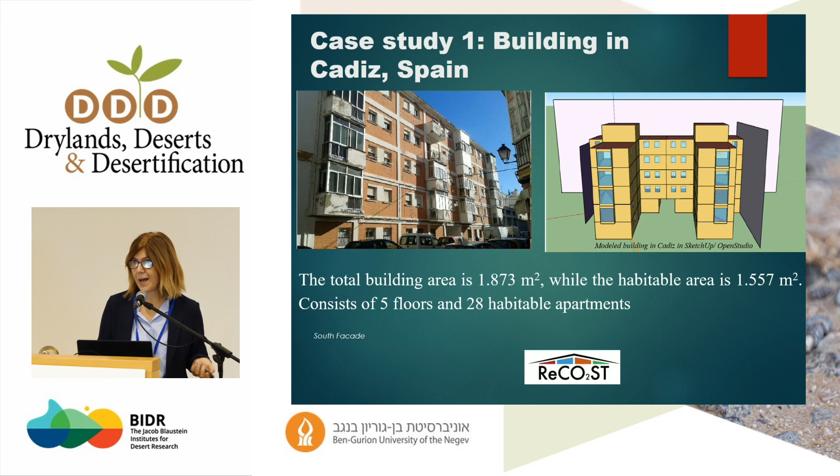You see here on the right a model in EnergyPlus, which we already mentioned we use to assess this. You see the application of the product on the roof. There are some technical details about the roof, and the properties of the cool roof are solar reflectance 0.89, infrared emittance 0.89, and solar reflectance index 115, which is quite good.

We use different liquids that are mixed and then applied in different layers. You see here before and after. This is simulation, but we also measured the surface temperature because I wanted to show you both at the same time, so you have here the surface temperature before and after.

In most cases, with measured results, the cool roofs have lower temperature, at least 10 to 12, 15 degrees. This creates a reduction of the total energy consumption.

There is also some heating load penalty, because if you lower the surface temperature of the roof, you increase the heating energy requirements, but depending on the climatic conditions, this might be zero or very, very little. There are also studies that show that even in climates in the center of Europe, for example in the Netherlands or in Germany, if there are high internal loads in the building, the application of cool roofs may make the difference between using or not using air conditioning while the buildings are operating, especially in industrial buildings.

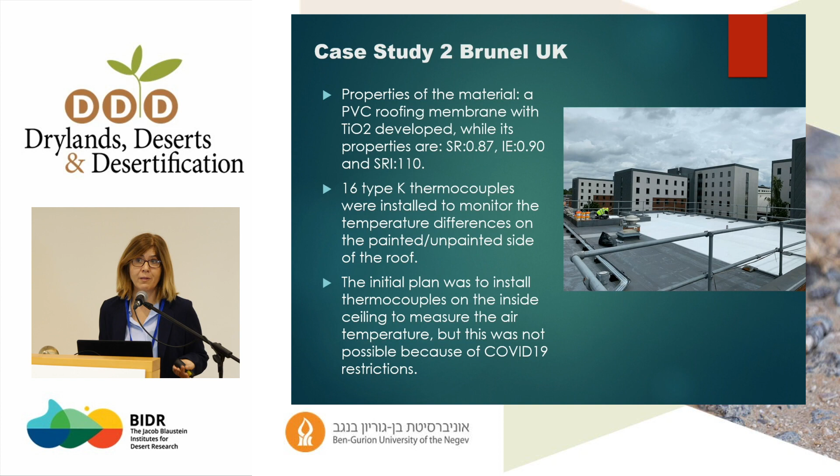The initial plan was to install thermocouples on the inside ceiling to measure the air temperature, but this was not possible due to COVID-19 restrictions, and also there were no people there inside during that period to monitor their comfort conditions. Here you see the monitoring results.

It's impressively high. And I will end up with a case study in Chania. You see here that we tried also to combine green with cool because it's aesthetically more acceptable instead of having these tiles of cool materials.

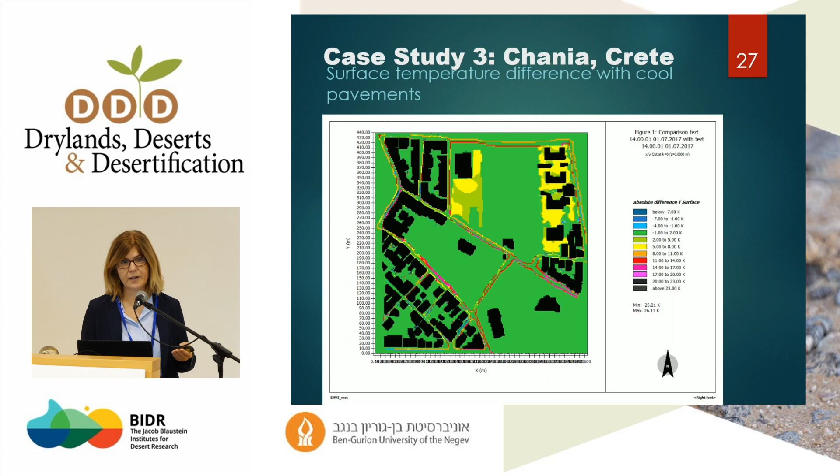That creates better comfort conditions at the ground level. And of course, I completely agree that we need to have urban green infrastructure in our cities - then we create very pleasant environments that are aesthetically acceptable.

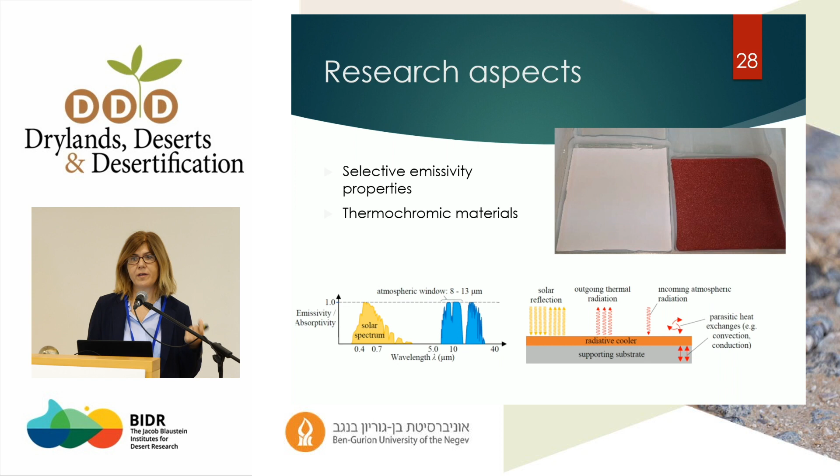Other work that we are working on is thermochromic materials - I'm not going to show you a lot about that, just ideas - and selectively emissivity properties, and also combining cool materials with storage, PCM phase change materials, and also we are looking at combining cool materials with photovoltaics. This is an application we're going to do in this pro bono project, and I hope in 2 years from now I'll have more results to show you.

So for that, I would like to thank you for your attention.

Department of Civil and Environmental Engineering, also Desert Architecture and Urban Planning. I work on energy, buildings, and people.

And I hope I can get my own presentation up here. It's not a touch screen.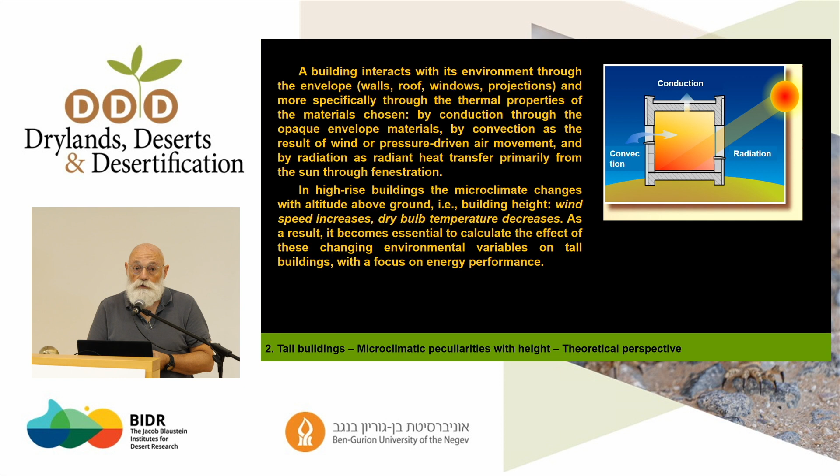We simulated their energy performance, understanding that what separates the outside with the inside, the outdoors with the indoors, is the envelope of the building and its thermal and physical properties, and that makes a huge difference.

So what did we find in this part of the study? Well, in high-rise buildings, there are microclimate changes with altitude above ground - as building height increases, wind speed increases, and dry bulb temperature decreases. This is the theory, but we measured that.

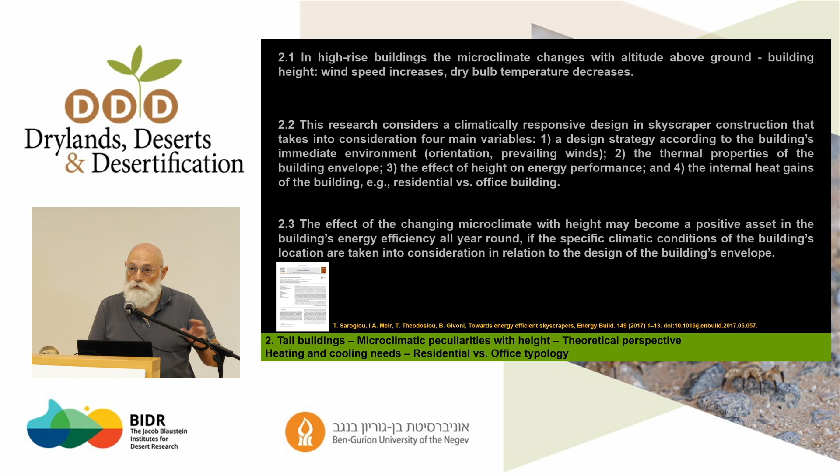I will just be showing what we published as we go along because some of the work is still ongoing. This has already been published and is available.

Our next step was to start talking about the energy efficiency of the building's envelope and how we can affect that. That's a tall building. This is a typical tall building envelope.

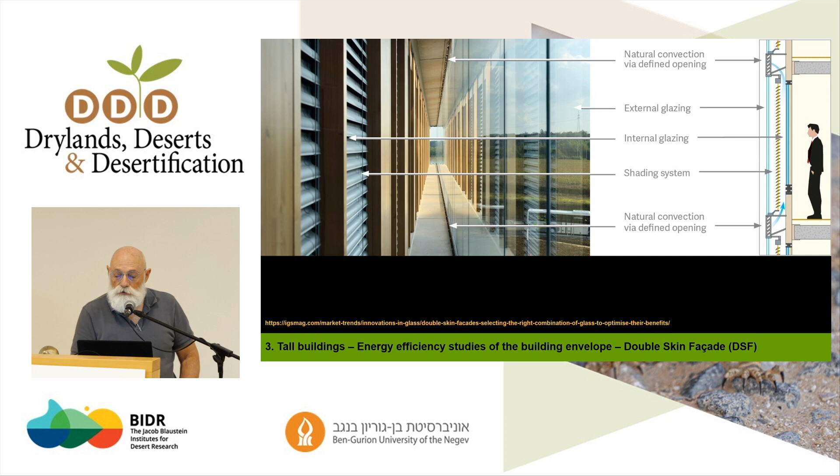Likewise here, the Technical University of Eindhoven, but we see something interesting here, as opposed to the previous two slides - an intermediate space between indoors and outdoors. This has become quite common in many tall buildings, which have what we call a double skin facade that has an indoor facade that may or may not include openable windows, shading devices or not, and then an external, fully glazed skin that provides some kind of access just to clean the windows, more or less, but also maybe to mix return air with fresh air, etc.

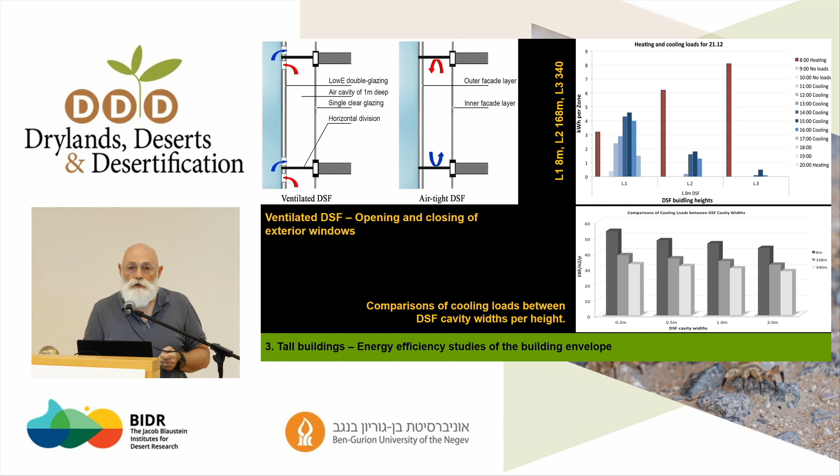With the width of the double skin facade cavity - 20 centimeters here, 50 centimeters, 1 meter, and 2 meters - you can see that there is a continuous drop, and of course that has projections on the financial issues of the construction.

As well as municipal taxes, etc. So what we got was a preference for double skin facades in order to lower the energy demand, and if we use a low emissivity coating on the external surface, which is not common practice in such glazing systems, we can drop the energy needs maybe by 15%. The wider this cavity, the more energy efficiency or energy savings we can have.

We published all of those results, the research and methodology, in 3 papers, not least the Council of Tall Buildings and Urban Habitat Journal, which is not exactly a journal interested in energy conservation, but rather one interested in tall buildings.

Our next step was to try and understand how the climate with altitude affects residential towers. The office towers we simulated earlier were the Alon towers in the central area of Tel Aviv and Ramat Gan, and now we are moving on to the residential towers just behind them.

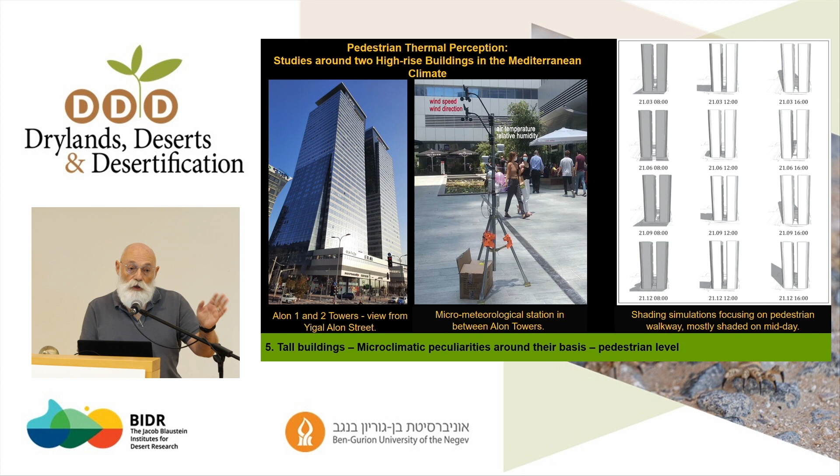So this is our case study, and this is our little monitoring station. We are measuring with two wind velocity and wind direction meters to make sure we get the right readings. We tried to understand if there will be any direct sunlight reaching that area full of cafes, etc. These are office buildings, and office workers will go down there to have lunch. As you can see from the shading simulations, it's practically totally shaded throughout the whole year, which may be good for the summer, but we'll see what it does for the winter.

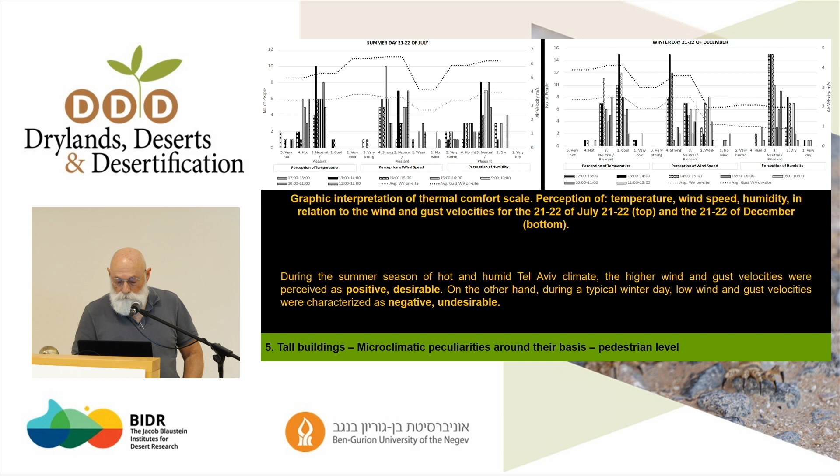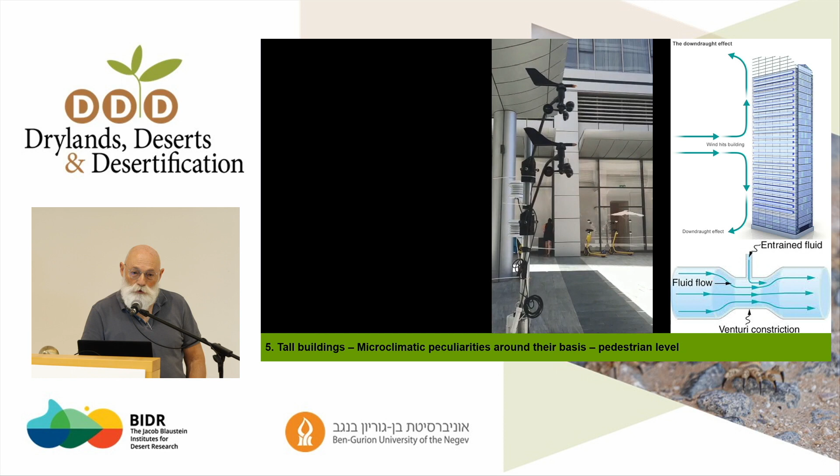For example, that thing over here, I hope it can work. But we have no sound, unfortunately. And this is summertime. You can see, oh, there it goes. This is what happens down on the pedestrian level. Summertime, high temperature, high wind velocity may be positive, but the question is, how comfortable does it feel?

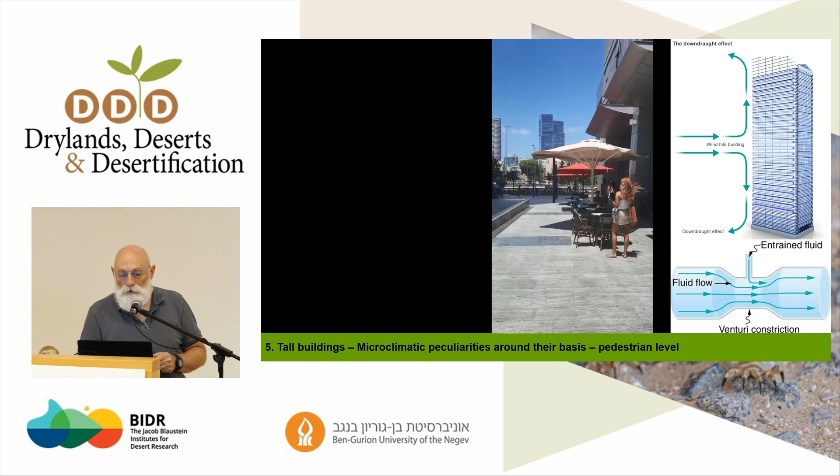On the right-hand side, you can see why we get such wind velocities, because when the wind hits the windward facade of the tower, you get a downdraft, which sometimes is much faster, much stronger than the original wind itself. In between the towers, of course, you get a Venturi effect, like trying to push a liquid into a very small section, so you get a very high velocity. This is what happens around tall buildings.

So just to conclude this part of the research, tall buildings block wind that passes over the rooftops of the average height of the building fabric and deflect it at a higher speed down to the street level, affecting pedestrian comfort. Predicting urban wind climate is not an easy task. No universal wind comfort criteria exist for pedestrians. To describe the complexity of outdoor thermal comfort conditions and create an understanding of the wind climate parameters, the subjective human perception was included throughout the questionnaires that we administered.

Where urban wind speeds are unpleasant, appropriate mitigation measures need to be implemented, which may include architectural features such as different walls and maybe canopies, etc., windbreakers, and built-up features that will enhance airflow where ventilation is considered appropriate or even necessary.

There is a need to better understand the relationship between urban design, outdoor thermal comfort, and specific climatic conditions, and I think all of the previous speakers focused exactly on these issues. This was published in Building Research and Information quite recently.

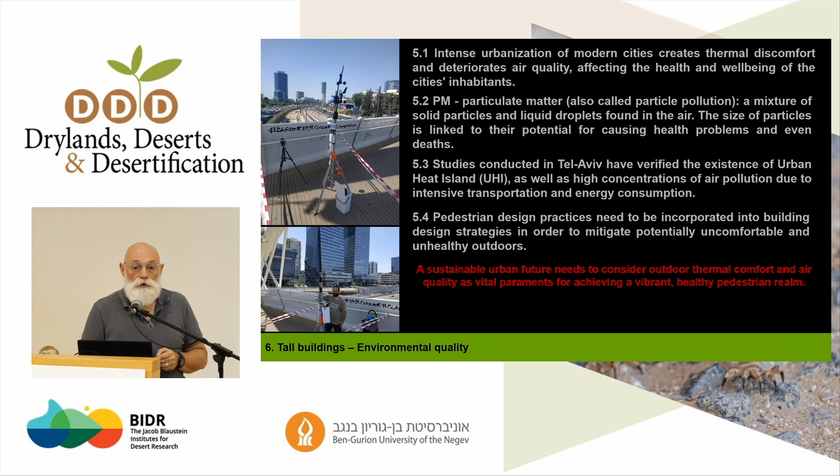Pedestrian design practices need to be incorporated into building design strategies in order to mitigate potentially uncomfortable and unhealthy outdoors. A sustainable urban future needs to consider outdoor thermal comfort and air quality as vital parameters other than just real estate values.

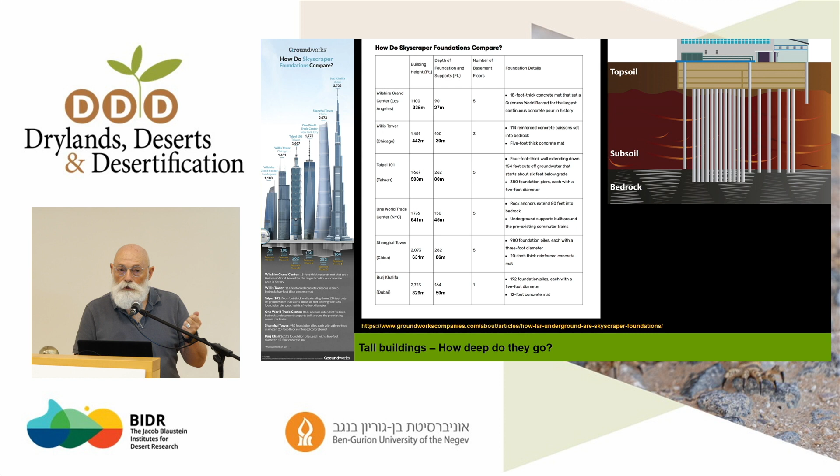Coming back to Susan Roaf, just to conclude: tall buildings have a whole array of other issues. They are tall, so they need deeper foundations. These are the foundations of the Burj Khalifa, 829 meters tall, and the Saudis are going for something even taller, 1 kilometer tall. Just try to picture it, a building that is 1 kilometer above ground.

The piles that start underneath this layer go about, there are 192 of them, and they go about 47, 48 meters deep. But this platform is more than 3.5 meters of solid concrete. That's what you need in order to keep this beautiful tower standing up there.

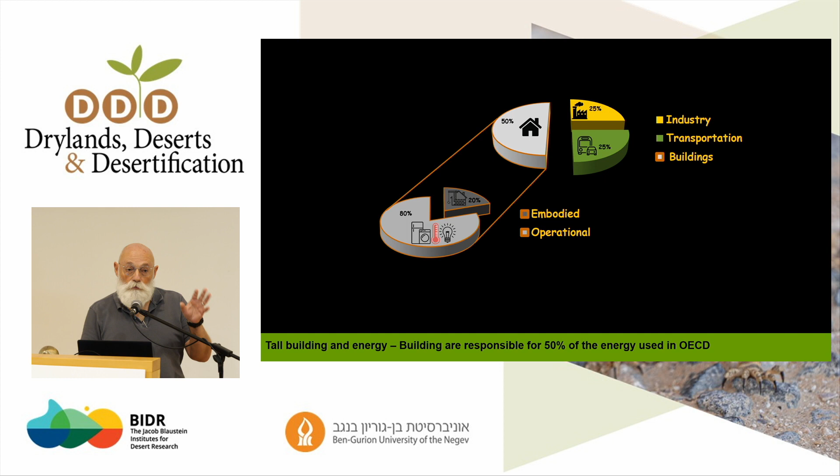Now, buildings use about 50% of the overall energy we use in industrialized countries, 20% that goes into the production of the building materials and the construction itself, and the rest goes into cooling, heating, lighting, and ventilating those buildings. So buildings are a huge problem, but maybe they are also the solution.

Tall buildings need more embodied energy, more energy into their production than lower buildings, and they need more operational energy for heating, cooling, ventilation, etc. And of course, when we build them like aquaria, like terraria, we keep forgetting that the moment the user goes in, they will start shading the place because what we have created for them is an exceptionally uncomfortable environment, visually, thermally, even psychologically.

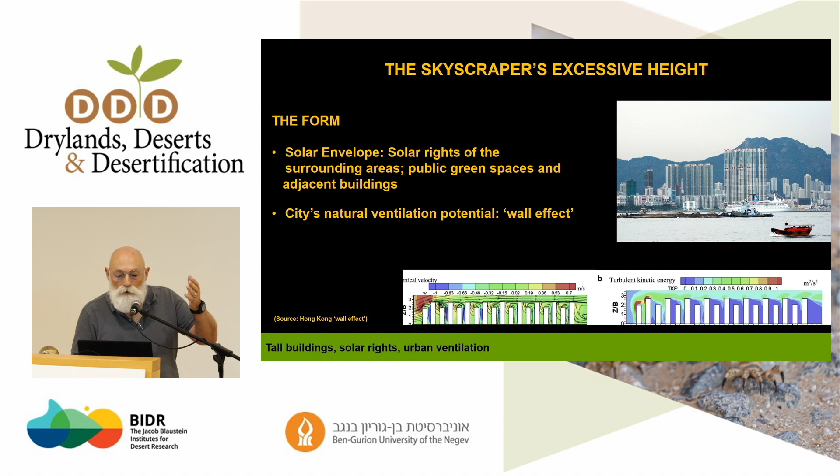Some of the better examples of tall buildings include the Walkie-Talkie building in London, which was designed so greatly by its architects that it has a parabolic facade that burns whatever is parked on the other side of the road. They create urban ventilation issues, and they have stability issues that have to be very well thought out, especially in countries such as this one that has a catastrophic earthquake every 80 years.

And we can calculate very easily the value of a human life, which is about 4,000 pounds, which is pretty cheap.

I want to thank all of those who have participated in this research and say that for tall buildings we can have densification, profit, and ego. But against it, we have a huge array of other issues that we haven't really understood quite well yet.